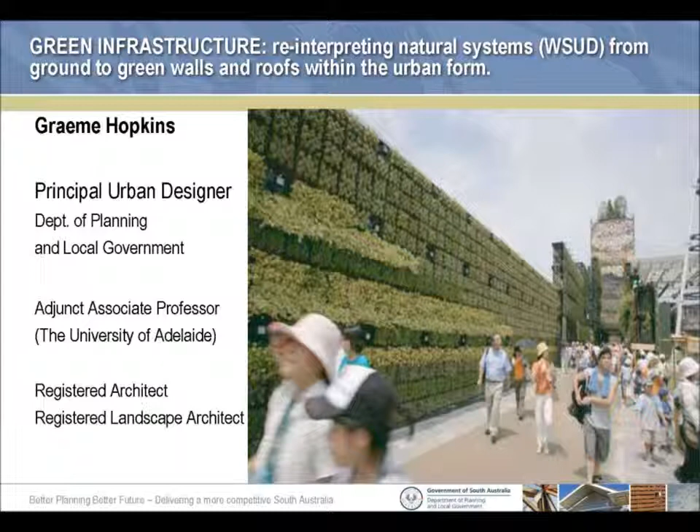I'll be looking at some of the natural systems, not all of them, and briefly talking about some of the things we're doing, especially at planning, which is quite interesting work, and how we can build up the density in the city and maintain our open space.

First of all, a city is an ecosystem. I'm not a scientist, so I have a very simple definition: an ecosystem is a community of living things interacting with non-living things. I understand that, and I think that's a really simple way to see it.

These systems are considered open systems, as both energy and matter are transferred in and out, with resulting change and evolution over time. That last phrase is really important nowadays, as our ecosystems and weather patterns are changing. Normally this happens over a long period of time. Now it's speeding up, and we have to get in and actually work with that quickly.

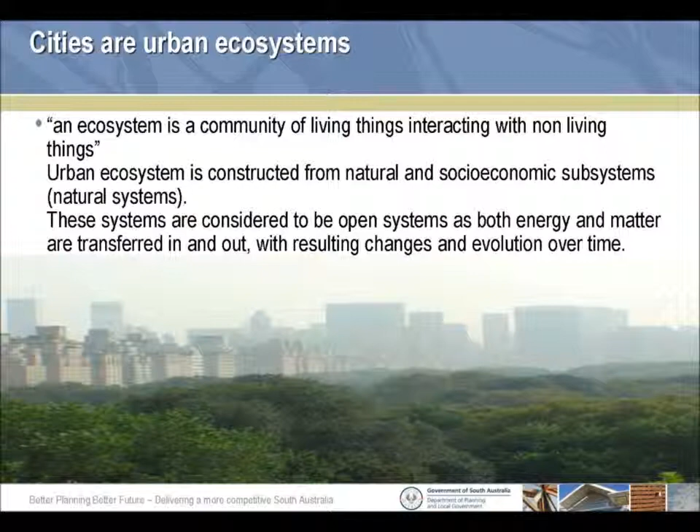So that's one premise. I work on two premises: a city is an ecosystem, and the other is that a city is a water catchment storage area.

What I'm saying is, if you look at the natural system, you get about 20% base load of water from the ground and 27% runoff, which is like Kangaroo Dam, so you get about 40% of the rain caught in that dam, if they're not topping it up from the River Murray.

But in a built environment, when you look at the city, your base flow is only 5% because there's very little infiltration, but your surface runoff is 58%. When you put those figures together, the city makes a lot more sense—you've got 63% catchment compared to 47%.

So if we're using those hard surfaces, water runs off, you don't lose it. But the trick is how do we store the water within the city so we can reuse it? There are things like roofs, vertical walls, storing the water in the road pavement and things like that, so we can recover that. Those are the two bases I'm working on.

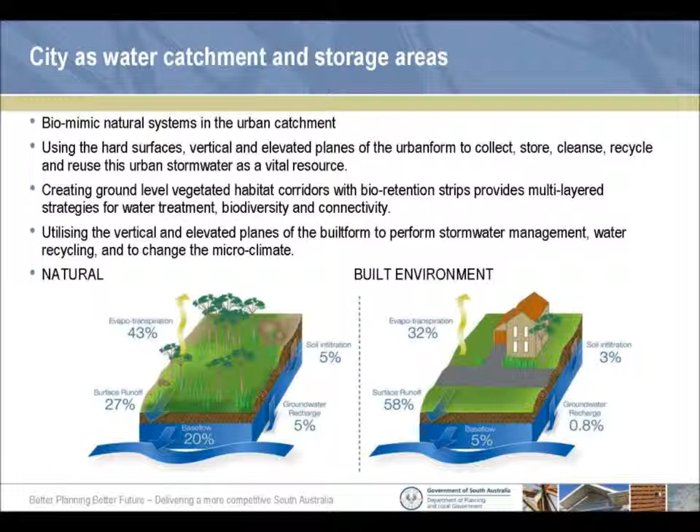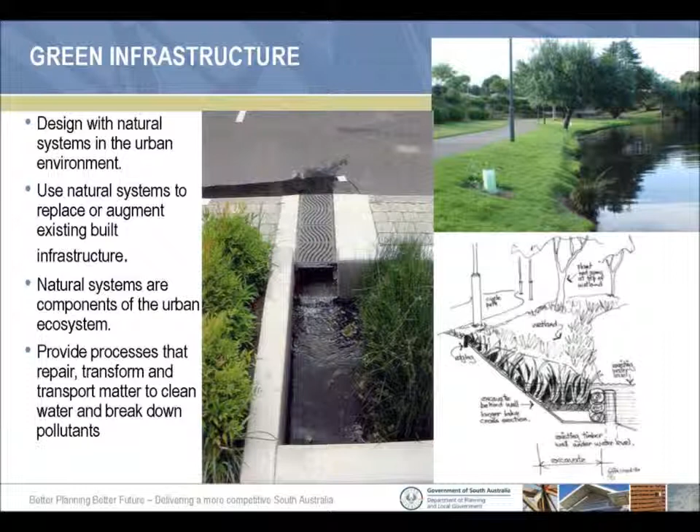So this falls into what I call green infrastructure, which is a common term happening around the world now, and I'm introducing this to government, which is another interesting process in itself.

What green infrastructure, as I see it, is using the natural systems in the urban environment to replace existing infrastructure—here's an example of looking at water. Our cities can't replace the infrastructure, it's too expensive, so we need to find ways of doing that naturally while enhancing the built environment around us.

So we can augment this, and it can be a great cost benefit to the state or to the city.

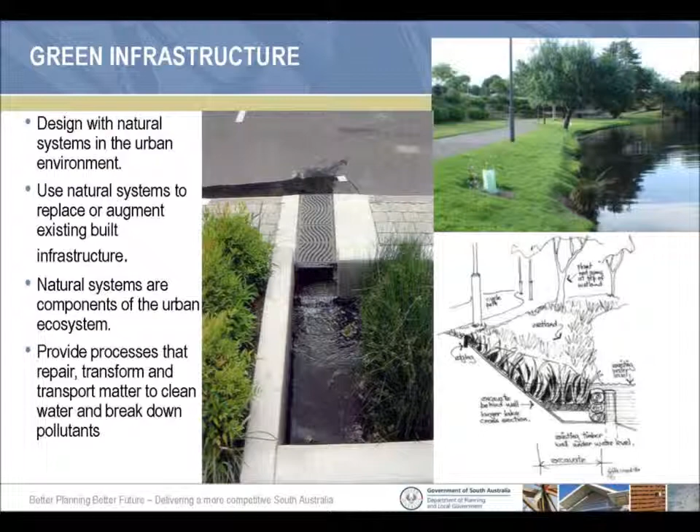The rainfall in Adelaide is going to be quite different to the way it is now. We're starting to get the effects—we're going to have about the same amount of rainfall, give or take whatever scientists you believe, but the way the rain's coming is going to be in bigger, more intense loads.

In the top diagram, the purple water is the rainfall and runoff we normally get on our paved areas. What's going to happen is we'll get that rainfall in bigger loads, so the blue on top becomes the water volume—those pavements are catching a lot more water. If we don't improve the infrastructure to take that water away, we'll have nuisance flooding.

So there are some real issues in the built environment—things like Rundle Mall will get a lot more water on its surface, and the infrastructure there won't cope. So we'll get wet feet when we walk down there, and it might even go into the shops in an extreme case.

So what we're looking at is the bottom diagram, where we reduce the catchment, the paving area. With that intense rainfall, we have a smaller, more current-like runoff, but we put it into the ground and into biofiltration strips—we actually let the water clean through these systems and soak in.

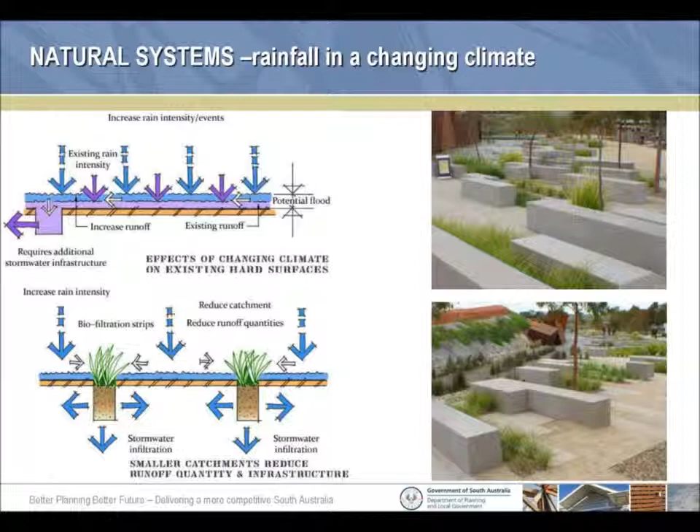So that's sort of looking at rain. Other things we're looking at is how you use trees. Trees are a natural system. They're a heat pump. There's air circulation around a tree within its canopy from its transpiration. There's water, different humidity levels and air pressure. So you get a natural circulation.

And this is some work being done in America for Dubai. Whether it's been built now with the financial crisis might be another story, where they're building giant artificial trees, where you actually bring in the hot air. The hot air might be up there at 40 degrees. You actually spray mist water, which then reduces the air temperature. You get a change in air pressure, and you can bring the cold air down through a downdraft chimney effect to bring the temperature back into the mid-20s at the ground.

Singapore are looking at this in their new parkland developments on their waterfront, and they're looking at these artificial trees that are 7 stories high. And that's a really old technique. If you remember back, people of my vintage, the old Parliament House in Canberra, there were the Senate and the House of Representatives courtyards. They had major trees in the middle, and those trees were designed to pump out the hot air. And if you look at the Treasury building, it did have big scale trees to do it. It's a very old technique.

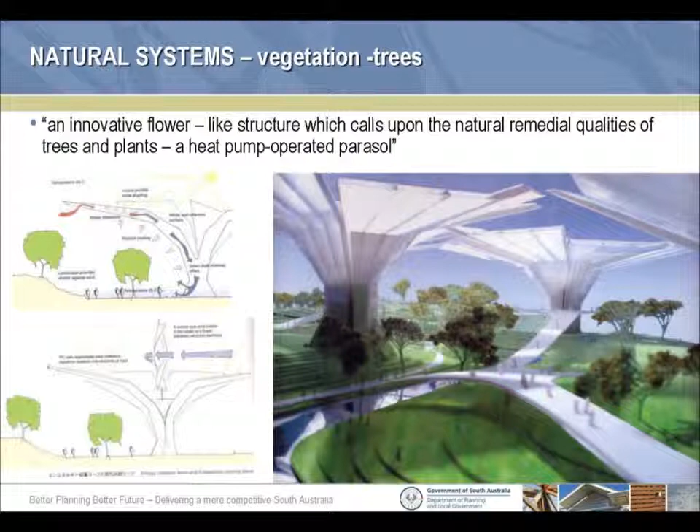Taking that principle, we can look at places like Rundle Mall and outside malls. They're going to become really less populated as the temperatures rise, as people worry about skin cancer. People are going to move to the internal malls, which have other social problems because they're private land and they can exclude different population groups, and because they're going to be air conditioned and comfortable.

But if you look at the mall, take that shade structure there, I quickly just did in principle what you could do. You can collect the water on the roof, take it down, store it under the paving there, put solar panels onto the glass. That will pump the water back up, mist it out, and then you start to get your air temperature changes and use the downdraft chimney effect to bring cold air and air condition these malls. Therefore, if you had a series of these, the actual temperature would be reduced, you could attract people back, and there's an economic advantage then back to those businesses.

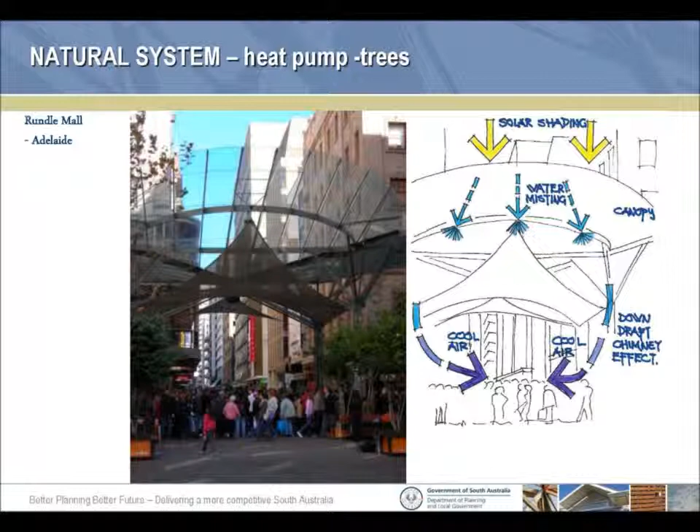So we've got to look at how we handle the public realm, and it's going to be quite different to how we're doing it now. And if you take these natural systems and you actually integrate them, they will then start integrating with each other, and you can actually treat pollutants and stormwater runoff and so on.

And this is a very quick conceptual sketch of a project we're working on with the University of South Australia. We've just got some grant money to start the preliminary design work, where we're looking at treating water, storing it under the road pavement within the airspace of the gravels, using street trees for shade, reducing the heat island effect off the pavement, using cool pavements, and then recirculating that water back into their new buildings as reuse water.

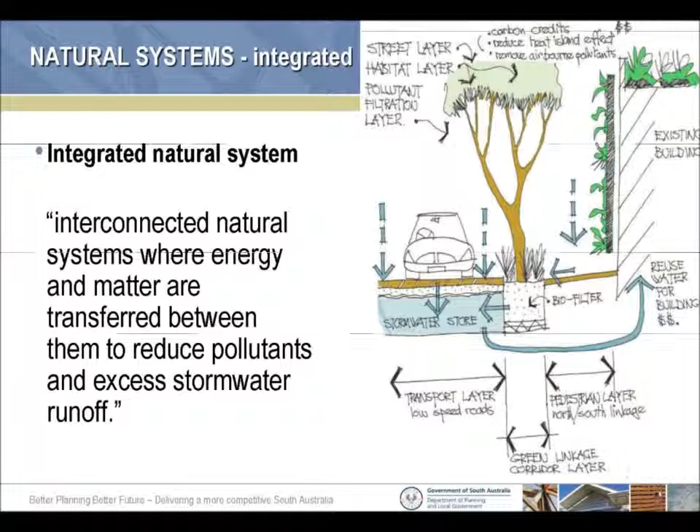We also start looking at using green walls and green roofs. Again, green roofs are extremely important for stormwater retention and so on, and the green walls are very similar, but we can use those green walls to cool the sun on the walls surrounding this laneway. And that brings me to where my interests are even more developed, looking at green roofs and walls.

Green roofs, you can use them as urban forms. You can do any shape you like nowadays, because the technology's there. And these dome roofs are the California Academy of Sciences, where they've actually used the topography to cool air and bring that down into the building to air condition the building. So there's lots of benefits. We can increase shade and insulation, reduce energy costs, and in multi-storey buildings we only have to reduce the amount of energy by a minute amount to get major cost savings.

As Stefan said, on a tower the sides are exposed, but on a tower like the Chicago City Hall, you just shade the top, and that has an effect for only the first few floors. So to me, then, we really need to look at the walls and have greater benefits.

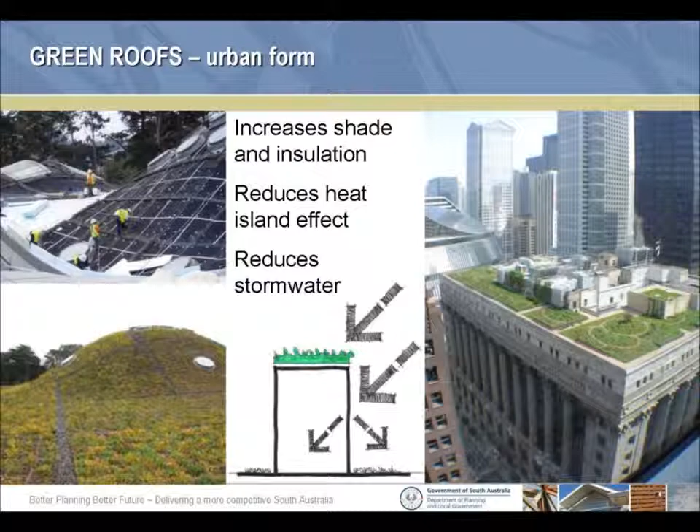But just looking at natural systems we can use on the rooftops, we can use the natural system of natural cooling by plants to cool the ambient temperature around photovoltaic cells. They can actually work up to 20% more efficient than on a conventional roof. This was a 5-year study by German scientists who have done this work. And if we were able to say we can get 20% efficiency in a new photovoltaic cell, the commercial world would take that up and say this is a great benefit. We can do this with a green roof, and we have lots of other benefits.

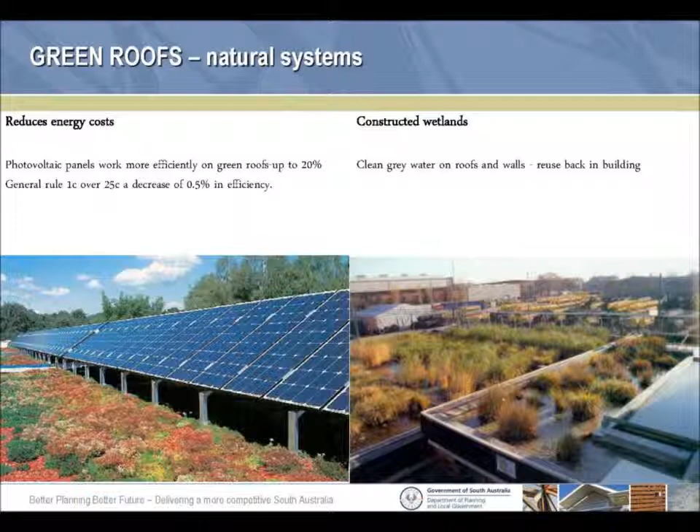We can actually put constructed wetlands up on the roofs, and this example here is a John Deere factory in Germany, where they take the water out of the production line, take it up on the roof, cool it, treat it, and then reuse it back into the production line. So the technology's there. We can actually have a lot of our wetlands up on top of building roofs instead of taking up a lot of ground space, which can be used for other functions. And in a compact city, ground space is critical. So if we can use the building fabric to do the same jobs, then that's what we're doing.

If we look at living walls, they give us urban texture to the streetscape and the form. But I think they have a big benefit to the energy use of the building, because if it's a multi-storey building, you've got a lot more surface area you can treat. Technically, it's a bit more difficult. It's not impossible, and with the new systems being developed, the cost is coming down. But again, they have similar benefits, reducing the heat island effect and so on.

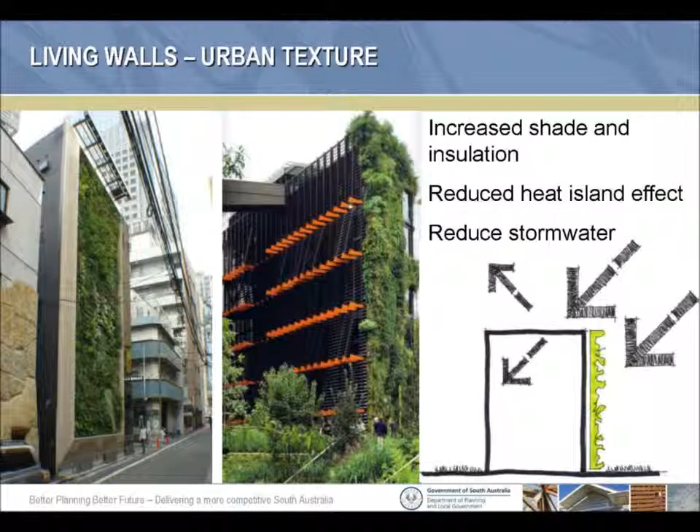But if you look at the living walls, the natural systems, you can look at a multi-storey building, and that's a section here on the right, where you can use the living wall as a biofiltration. You can take the grey water out of that floor, run it through the system and then bring reused clean water back into the next floor and so on. So you get this cascade effect happening right down the building. This technology is available. We can do it now.

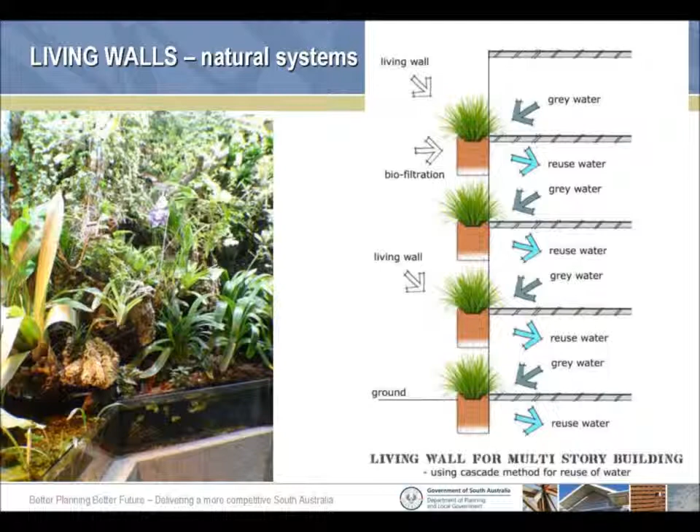And on the left is a vertical wall with a fish pond at the bottom. This is in Toronto, in the Canada Life Insurance Company, where the water from the fish pond area is recirculated up to the top of the living wall. It then cascades down through the living wall. The fertilisers and the nutrients come out of the water. The plants use that as their fertiliser. The water comes back down to the fish pond clean, and it's just a constant cycle going on. So we can look at these ecological principles to look at our building facades, and we can do this if we really want to.

If we put those two together, we get this ground roof connection, and this is where I see a great opportunity for Adelaide. This building's in Fukuoka in Japan. It's quite a famous building, stepped there. But if we had building envelopes and control around our city squares, with buildings that step back with greenery, those city squares would have 4 to 6 times more biomass, and the cooling effect of that would have an enormous effect on the city itself. And we've got 4 major squares. So there's really interesting urban forms to look at in here.

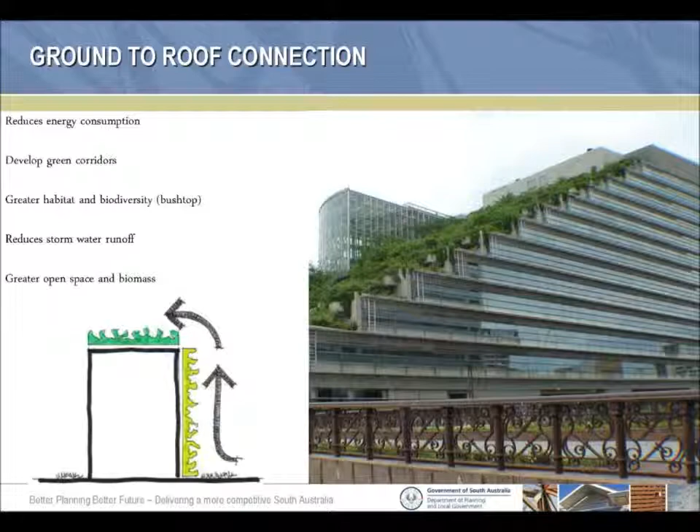If we look at these living walls and green roofs and say they're bush tops, they're ecological habitats, and then say they're the habitats of what was originally here, this is what I call a bush top. It's basically looking at what was here in the CBD before we converted it. And we put that on our walls and on our roofs. We can start getting a mosaic of a pattern running through the city.

The city had migration patterns for insects and birds through it before we built it. So my work is to look at them and set up these stepping stone corridors so we can get those migration patterns happening again. And I'm using a metapopulation theory developed by Paul Ehrlich back in the 70s. This has been developed in California at the moment.

It's the only other place in the world where I know we're working on the same sort of principle, where you don't have to have a corridor that's constantly connected. As long as the distance between the roofs or the habitats is within the migration or flying distance of your targeted species, then they will move along and colonise these areas. So we're looking at the CBD; there are various routes we're looking at the moment.

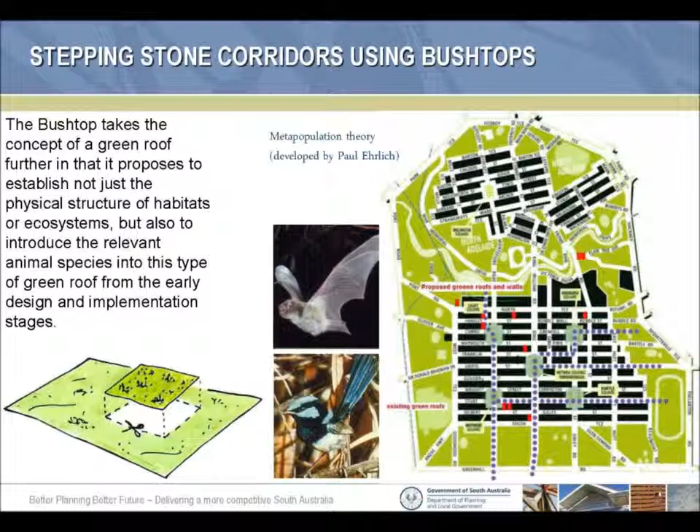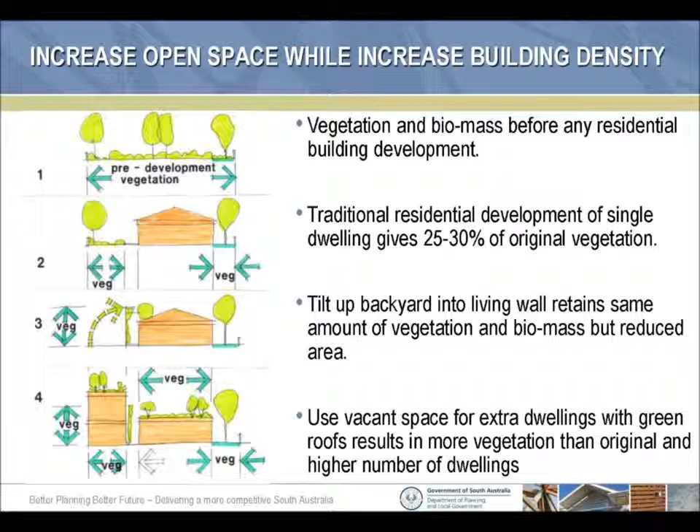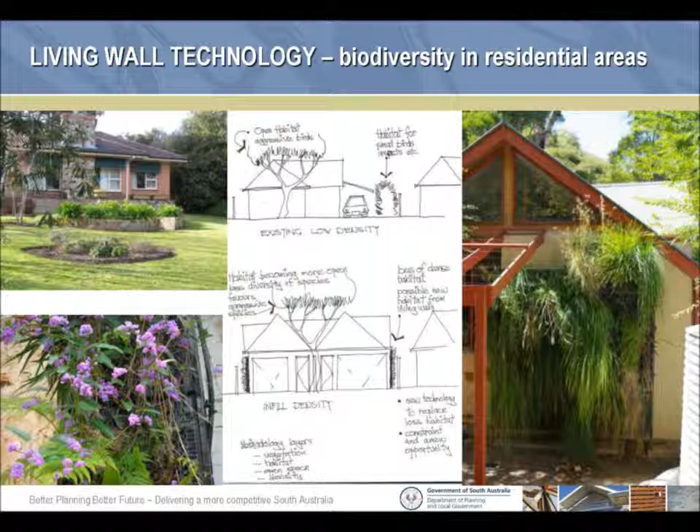When we redevelop, we put two houses on the site where there was one. That hedge is the first thing to go, so that habitat disappears. What we're saying is this green wall, living wall technology could be put on the house or on the fence to recreate that habitat. We can increase density while we maintain the urban habitat, and that's a really important factor. And we take that one step further.

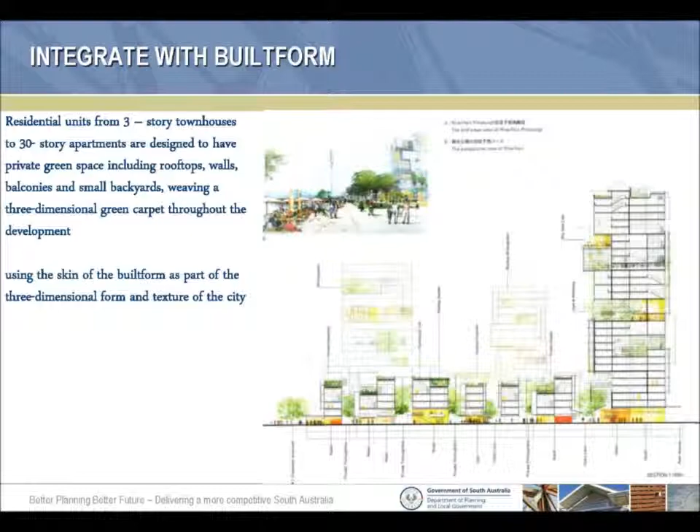We look at really dense, more TOD-type developments where we can put green roofs, living walls, green balconies, parklands within the city. We form this three-dimensional open space system. This is really what I'm working towards in the Department of Planning, because we're used to a two-dimensional everything on the ground, but to get density and more open space, that's what we're up to. And so on.

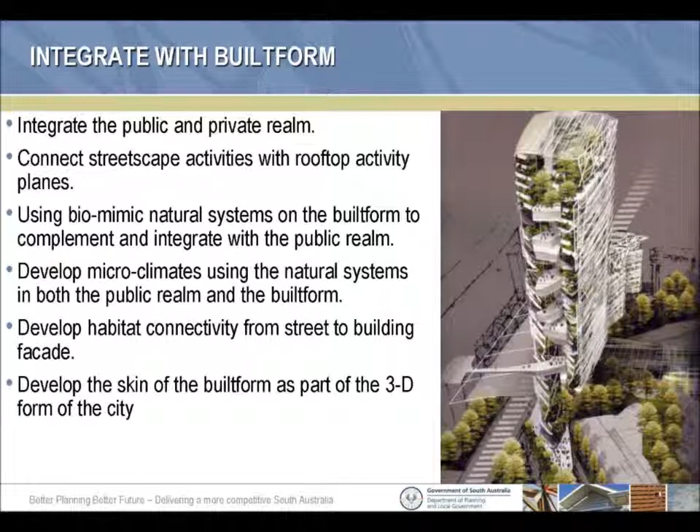This is a Yeang building, as people would recognise. We need to integrate the public streetscape with the building facade and the rooftop and put it all together. We're looking at things like the heat island effect and the cooling effect of the city. We started a research program so we can get enough information together in the next 12 months to 2 years to start building envelopes where we can target putting green onto the building in strategic places to absorb the heat or cool the area.

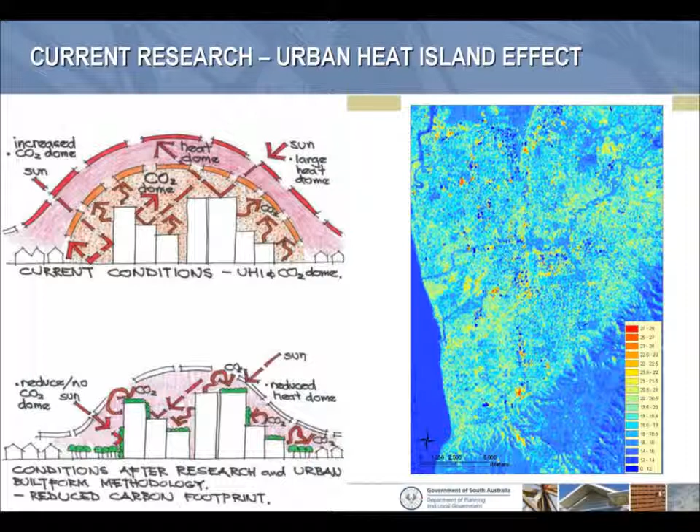And there's a secondary one, the carbon dioxide dome sitting over the cities. We can reduce that by the vegetation. This is the last slide, so I'll finish shortly. This is a program we're developing out of planning, to reclaim the rooftops. The rooftop is a wasted space in most cities. When you think about it commercially, there's a big area of rentable space for the building owner, and they don't even consider it.

We've broken it down into four elements. The environmental element, adapting to climate change, our bush tops, our habitat process. The lifestyle residential rooftops, with a lot more green space within the living areas of residential complexes. The commercial rooftop, where we can have deck chair theatres, child minding centres on top of car parks with green roof playgrounds, where if people have to drive to the city, they drop off their child there, even come back at lunchtime, and then pick up their child and go off.

And the fourth is what Stefan was talking about right at the end, and I agree with him: food production. If we can grow plants on a roof or a wall, they can be edible plants, so we can have production on roofs, walls and so on. This reduces the food miles, and there's a commercial element to complement the environmental issues. These are the things we're looking at in planning.